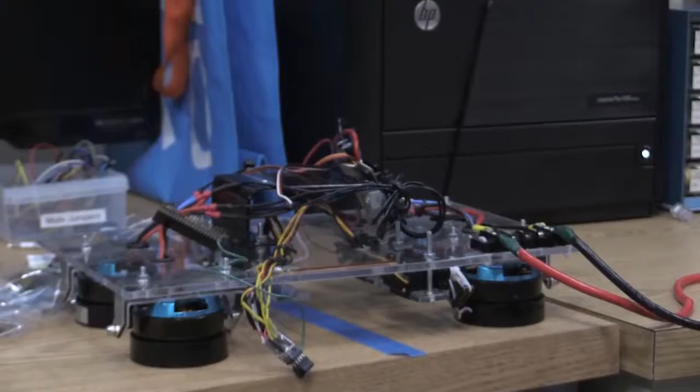I'm standing next to the lead engineer for Team rLoop, Thomas Lembeau. He's the man who brings together the disparate talents needed for the rLoop effort. Thomas, what's different about rLoop?

We know that you're the only non-school entry allowed onto the track that has advanced into this stage of the competition. But it's not just that you're not attached to a university, it's the fact that you are really an open source organization. What does that mean?

We have people from all around the world. We don't have any doors per se, anyone can come in. We have people who are in high school, people who are retired, people who are jobless or students, we have CEOs of companies. So we are really open to everybody. Anybody can join, they can bring their piece to the puzzle and try to help us with our task of building the Hyperloop.

That is revolutionary in and of itself, because if you look at all the other entries, either related to universities or supported by large corporations, it's the traditional structure. You earn your bones, you get your education, you get your degree, then you come in and they tell you what you're going to work on. It sounds to me, with literally hundreds of people who have been part of your team, who are active with your team, you sort of say, well, what can you do?

Yeah, we need that, go ahead and come on board. We take a totally different approach: instead of assigning tasks to people, people assign the task to themselves. So the way we do it, we have a core team behind that is basically breaking down the whole structure of the Hyperloop, what it's made of, and breaking that down into very, very small tasks, micro tasks.

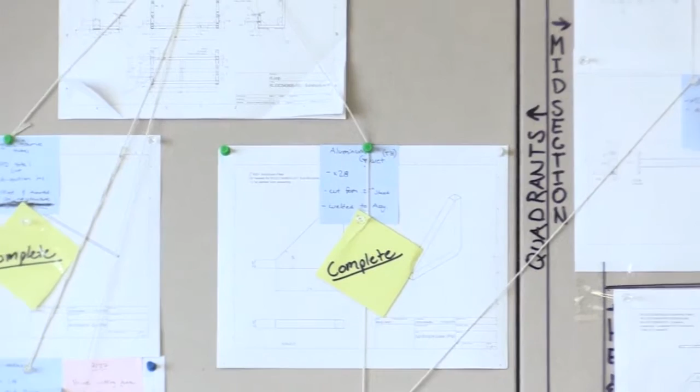People join and they see those micro tasks and they say, oh, I think I can do that part. They don't have to understand the rest of the design per se, they have to understand some of it, but they can just pick that thing and do it. That's the way we've been approaching it: if you join in, if you think you can help in any way, look at what we have and feel free to participate. We've been touring around your facility, which by the way is fantastically provided to you by TE, a company here in the Bay Area.

And we can see behind us this wonderful board of how your system is going to be integrated. And I can't help but look at this and say, this is really expensive. We're talking about thousands upon tens of thousands of dollars worth of equipment, sensors, motors, the hover engines. How exactly is that being funded? You're a nonprofit, you don't have big corporate backing, so how do you pay for all of this?

So we pay for that the same way we build this thing, which is crowdsourcing. We had a crowdfunding campaign where we raised more than 60,000 on Indiegogo. We have some private sponsors, including TE Connectivity and Soylent, who are our main sponsor.

And we're also taking the approach, since we're in the heart of Silicon Valley, of the DIY, garage-style approach, where let's not reinvent the wheel, let's not make expensive things. There are a lot of things out there that are off the shelf that really do a pretty good job. It's just a matter of tuning them, putting them with the right other parts, and finding cheap ways to do it, but yet robust, reliable, and able to do the job.

All right, let's talk a little bit about the cheap way of doing it, because of course there are people who say that this is a moonshot, something like the Apollo program but for public transportation, which it is in that it's exciting and it's energizing the engineering community. But at the same time, unlike the Apollo program, the technologies that you're using are here.

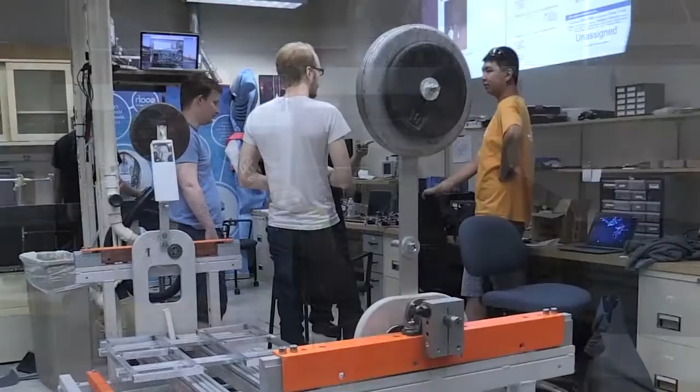One of the other things is, because it is volunteer, not everybody who would be perfect for the job can volunteer. So there's some times where you might have 100 experts, but all of them have 80-hour-a-week jobs. So you need to be able to pull talent from where it comes from. As a true global organization, one that pulls talent from every time zone, every part of the planet, isn't it difficult for you to stay on schedule? Because ultimately it is a competition. You do have a deadline. You do have to get a product onto the track. Doesn't this make scheduling difficult?

It definitely does. One thing that I think is very unique to us is that companies pull talent. We're kind of amassing talent. People are coming to us. We're not reaching for them. So the motivation's a lot different. It's not for a paycheck. It's, for lack of a better term, changing the world. So it's more something that people want to come to. It's not so much of a job for people. It's their weekend project. It's what they do to get away from their day job.

So people's motivations, people are very internally motivated here, and you're able to not have to really worry about deadlines and such, because everybody is so focused on getting things done that there's really no reason not to throw your heart into it. It's not a job, it's a passion. And whenever you can get people together for a passion rather than a paycheck, something magical happens.

Now, let's talk a little bit about that magic, because I heard an interesting story this morning as we were touring the halls, and that was about an Uber driver who joined the rLoop team. How did that come about? So that was a very interesting story. Probably my favorite story about rLoop so far.

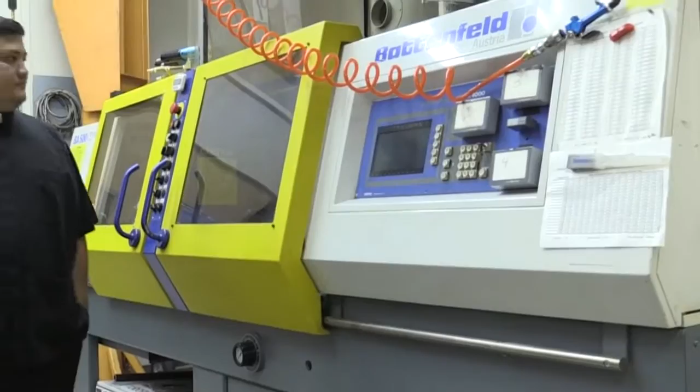It's been absolutely key. We lucked out with TE. They have, as you can see, tons of equipment around us, lots of crazy expensive machines that we would never have access to. We could have always gone the makerspace route, which was actually our primary option. That was what we planned on doing and getting a warehouse space. But TE was nice enough to let us come here, use their machines, and give us some of their experts as well. So there are some people from TE who, of their own accord, came down and help out.

Dante, thank you very much for speaking with us. Thank you for sharing the story of rLoop. It is always nice to see an organization that has really become sort of the Burning Man of the Hyperloop competition. And we'll get back to the rLoop offices and the technology that they're creating to build the next generation of public transportation.

With the Hyperloop being such a futuristic concept, it's no surprise that you need some pretty sophisticated software to make it work, which is why we're speaking with Paul from the rLoop effort, who's going to explain to us how they keep their pod on track. Paul, the rLoop entry actually has two different control systems. Why is that? Right, yes.

So we have a real-time control system and a non-real-time system. The non-real-time system takes care of communication with the ground station and updating software. So for example, if we need to update our algorithms or fix bugs or anything that might come up, we can do that remotely using this non-real-time system.

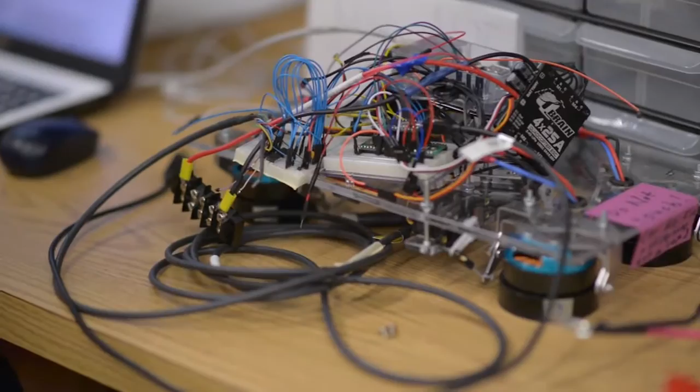Okay, so we use Teensies and Raspberry Pis. So the code running on the Raspberry Pi, I think it varies. We use a bit of C, and we also use Python quite a lot. Python's very useful for communication, for rapid prototyping mostly, and because it's non-real time, we can afford to use it in the non-real-time side of things. For the real-time side of the system, we use C++ on the Teensies. So that allows us to have the performance that we need to run these algorithms.

I think that's actually a good lesson for our audience who may be wondering when you use different devices. We do a lot of projects on our network, and people are saying, well, why wouldn't you do that with a Raspberry Pi, or why wouldn't you do that with an Arduino? And talking to them about an embedded system versus a system with an OS, well, it really becomes important when you talk about a transportation system like the rLoop.

Last question. As you're looking down the line, because again, you are coming close to a deadline here, end of October, this has to be on the track, it has to be competing. What do you see as the big software challenges? What keeps you up at night? Right. So personally, the thing that keeps me up at night is the fact that we have a number of what we call nodes, which are essentially a Raspberry Pi and a Teensy together, and these nodes each have their own job. They each have their own purpose, and they have to communicate together.

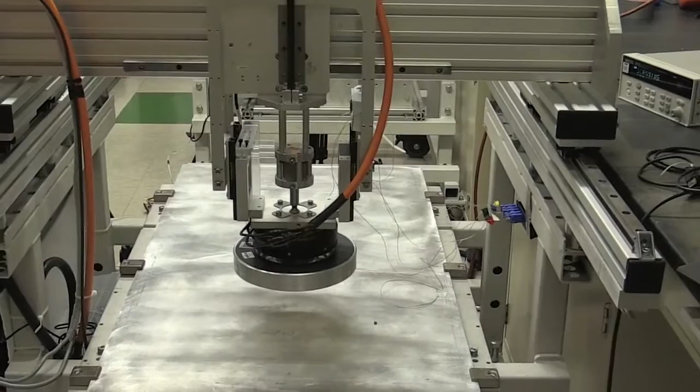It just creates a magnetic field, in fact multiple magnetic fields. How does this keep the craft from touching the ground? The hover engine is basically magnets, rare earth neodymium magnets, arranged in a special orientation called a Halbach array. Every magnet is arranged next to another, and the magnetic fields of both magnets are at 90 degrees.

So when the engine spins up, it creates eddy currents into the substrate, and those eddy currents create a secondary magnetic field. By Lenz's law, that magnetic field opposes the way it was generated. This in turn creates two kinds of forces, both mutually perpendicular to each other.

One of them is the lift force, which is higher in magnitude, and one is the drag force. Since these are arranged in a Halbach array, the drag force is very small compared to the lift force. That lift force allows us to levitate above the surface.

These engines have a nominal load capacity of about 45 kilograms, and the maximum they can take is 68 kilograms. For efficiency, you'd want to match a weight between 40 to 50 kilograms, but if using them to full potential, you can go up to 60 kilograms as well. These engines are really good. We are using 8 of them.

4 of them are on gimbal. The 4 fixed engines provide straight levitation, while the other 4 can gimbal and provide propulsion and braking. This is the hover engine which we bought from Arx Pax.

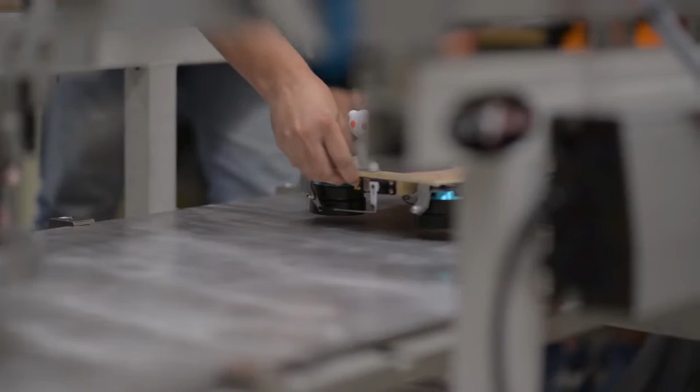People are going to look at the small scale device we've got footage of and wonder why the gimbal only goes side to side. In our minds, we think if you want to go forward, you'd aim all the hover engines back, and if you want to slow down, you'd aim them all forward. But that's not what you have to do when dealing with eddy currents. Tell me, how does that work? How do I get forward acceleration, and then how do I get braking?

It all depends on how the levitation force actually works. If you've seen the reverse thruster in an airplane jet engine, how it behaves, they open up and air flows through the backside of the channel, acting as a thrust reverser. It's not exactly the same, but in some way similar to how gimbaling this way will provide you braking, and gimbaling the other way will provide you acceleration.

If you take a look at the magnetic field arrangement and how lift force is generated, it's currently like this, and if you gimbal them somewhat inward, it's going to provide some braking, and if you move them outward, it's going to provide some sort of thrust.

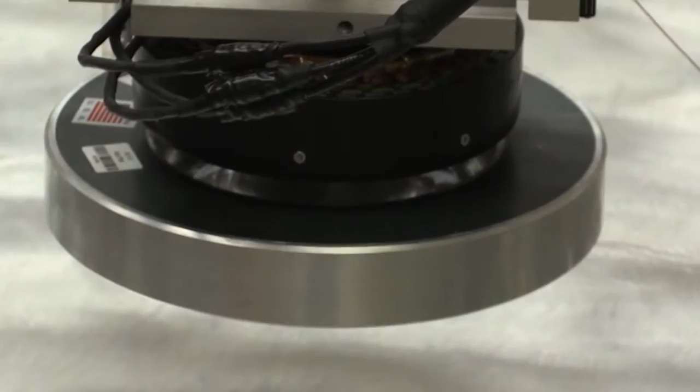Let's talk a little bit about the intricacies of this propulsion, because the hover engines are fantastic. They're wonderful to see in motion, but you need to keep your pod within 1 degree of its intended direction, which means you've got a lot of sensors that adjust that gimbaling to keep it on the I-beam. Is that really a challenge, or has that part been licked?

So yeah, it's a challenge, and we have solved it for now. The hover engine, you have to keep it stable at exactly 90 degrees so that you're not creating any kind of thrust. Because when you're in a low pressure environment, there's nothing resisting that drag, nothing resisting that forward force, which you're getting by just a little bit of tolerance stack up of the engine. So you have to be very, very exact and very, very sure of what you're doing with them.

And a lot of teams have been using them. A lot of teams have come up with their own control systems, but we are using distance sensors, laser range finders, accelerometers to keep all the telemetry data inside the flight computer, feed it into the flight computer, and get a feed of how to control these engines.

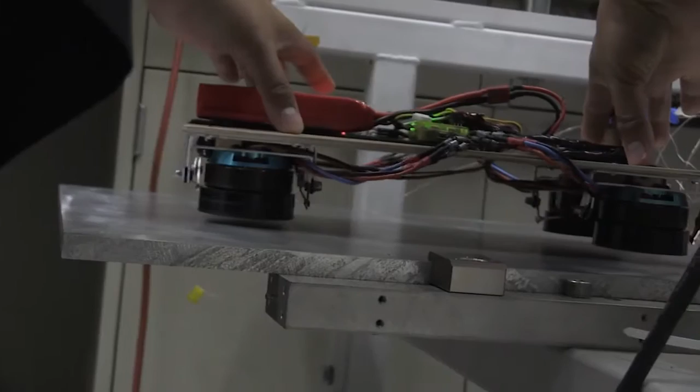So the SDK which you have seen is our test bed. Our goal with that is to control that SDK within, not exactly millimeters, but micrometers of accuracy, and then we will upload that software onto the same hover engine. So we have to test and benchmark our software and control systems on the SDK, and then we'll move on to the hover engine.

Amir, one last question, and this is my inner geek screaming out. You mentioned that you're going to be working in a low pressure environment, and anyone who's ever dealt with thermodynamics knows that low pressure environments are really good insulators. That's why we have vacuum thermoses. You're going to be pumping a lot of power through these hover engines.

I believe the nominal voltage was 72 volts, and it can pull up to 70 amps on startup. So this is an enormous amount per engine. That translates into heat, so they're going to warm up, and then you're going to be in a near vacuum, so they're not going to have the convection cooling that they would out in a normal environment. What are you going to do to make sure that these don't melt down on the track?

So thermal systems has been one of the issues with the whole Hyperloop concept in general, because in a low pressure environment, it's hard to get rid of that excess heat which you're generating. And with aluminum, you're going to see a skin depth effect, so that's there as well. And with these hover engines, you're right.

So the nominal voltage input is 50 to 72 volts DC, and the current input can go up to 125 amps. So it's going to generate a lot of heat. To mitigate that, we started with a bunch of different cooling systems. We reviewed different options and came up with a liquid CO2 option, because you seriously don't want to go into cryogenics, because anything above liquid CO2 is cryogenics, and that's a whole different level of complexity you're going into.

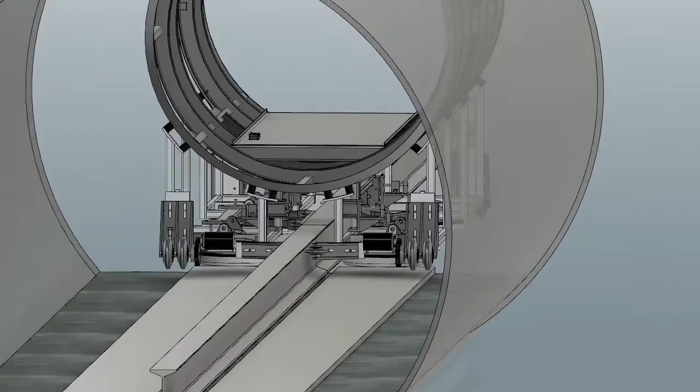So when the magnetic propulsion system is in use, we have the auxiliary propulsion kind of stowed away, almost like a landing gear system you'd see on a plane. Whenever we have a power failure or some need for this system, an actuator pushes the wheels down, and it'll be able to support the entire pod and make sure we don't land on our failing magnetic levitation system.

Our audience is pretty techno savvy, so they're going to want to know, as we get to the competition in October, when you actually have to get your integrated vehicle on the rails...

So not just the levitation engine, the hover engine, not just the frame, not just the software controller systems, but everything all in one package. How much of that vehicle that we see would be incorporated into the real vehicle? I guess the question I'm asking is, how much of this can you shed once we get to full-scale production? I really don't know too much about that, to be honest.

Being so new, I would imagine we would still need an auxiliary propulsion system. The magnetic levitation, I think, is there to stay. I think we are designing it such that we don't have to shed too much and redesign very much to be able to upscale this to full production.

So, Matt, rLoop is an interesting group in that you have a lot of people who just sort of come in, they donate their time, they donate their experience, and then they'll be off on their way. I understand you've only been with the group for about 3 weeks. Tell me a little bit about yourself. How did you find yourself at rLoop?

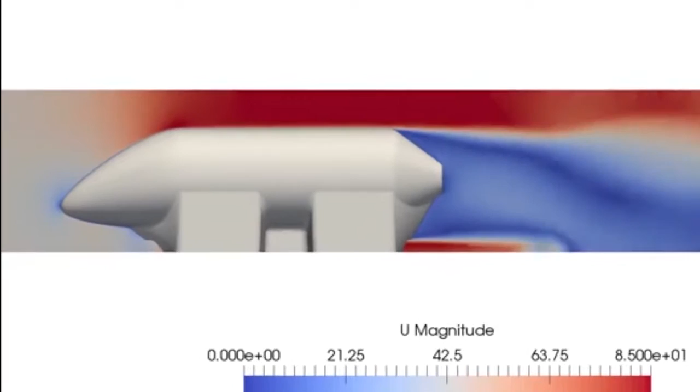So I'll start with one thing, that this pressure vessel is exactly similar to a pressure vessel of a Learjet, because it meets all the airworthiness and crashworthiness standards of the FAA, and we've put into analysis all the body loads of crashworthiness and airworthiness. So this is exactly similar to a fuselage of an aircraft. And because the guy who designed this, our Aero and Structures lead, works for a private company which designs business jets, this is exactly his idea.

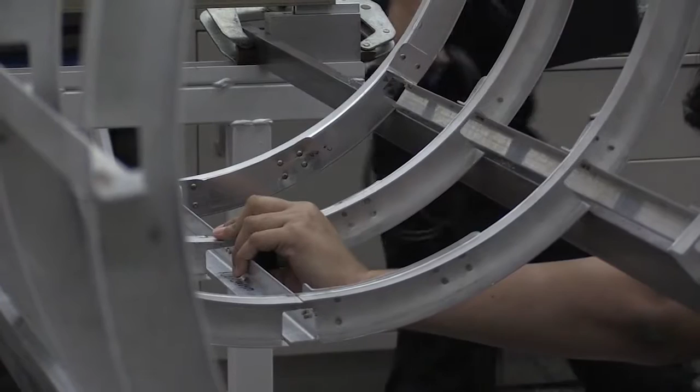The reason behind doing a pressure vessel is that we are operating in a low pressure environment, and there are certain things that don't do so well in a low pressure environment. So we had to make sure that the components we are putting in can be functional inside a pressure vessel. That's why we came up with the whole pressure vessel idea, to put all the electronics, batteries, and other systems which cannot face the low pressure environment into the pressure vessel. So this was the beginning of the pressure vessel, and then we did analysis. We analyzed it for FAA standards, and then we put it through some testing.

So the basic skeleton is complete. We just have to put the skins on top of it, and before we do that, we have to put all the components inside, put the skins on, and do some leak testing, and we'll see how it behaves.

We've all seen different variants of what will go into the Hyperloop test track, and everyone has their own special sauce, their own design. But what I've always found interesting is they all look like airplanes, like aircraft. The fuselages are shaped to look like what we think is fast. But you're going to be operating in a near vacuum, a very low pressure environment, so the natural pieces I would put on an airplane won't work there. I can't use things like surface effect and ground effect.

So could I just make a bullet-looking device and shove it down there? Would that be as effective as any pod being created for the competition?

So there's one point: we're not really operating in a vacuum, it's just a low pressure environment. Vacuum is like millitorr of pressure - that is vacuum, like in space, where things start to disintegrate and outgassing effects happen. So in our case, we are not really operating in a vacuum environment, it just happens to be a low pressure environment.

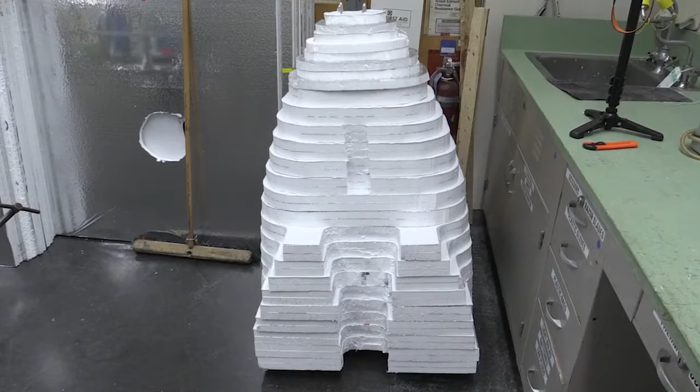And the point that you can make something bullet shaped and shove it through the tube may work - theoretically it will work - but you have to have control of that, because you're not really going for aerodynamic surfaces to generate lift and stuff. At least you have to make the nose cone such that it can direct the force over the pod, and there are no shedding vortices behind the pod. So you have to be careful with that, but you really don't need to be so aerodynamic about it.

In our case, like if you see, it's a work in progress, the aeroshell. This is like the male mold we are building. It's styrofoam - we'll put some Bondo, sand it down, cure it, and then make a mold, and then we'll do a fiberglass nose cone from this mold.

And from the back of the pod, we are using some carbon fiber straps, and we're not really concerned with the back side of the flow. But for the forward nose cone, we want it to just be fiberglass, and that's it - this is what it takes to go through that low pressure environment. Besides, this is a project of passion, and no one really wants to make an ugly ship. This is something people want to see - it should look a little futuristic, a little bit sci-fi.

Now, let's scale this up. Let's say rLoop goes into full production with your finished product. What are going to be the challenges for moving from a test vehicle like this to something that could actually hold people and cargo? You do have the challenge of having regular pressure outside of the Hyperloop, low pressure inside, and then high pressure again inside the cargo vessel. But what else? You've got to fit all the equipment, all the components, the hover engines, all the safety equipment, the auxiliary propulsion into one single vehicle, one single pod. In your mind, what will be the big challenge in moving to that stage?